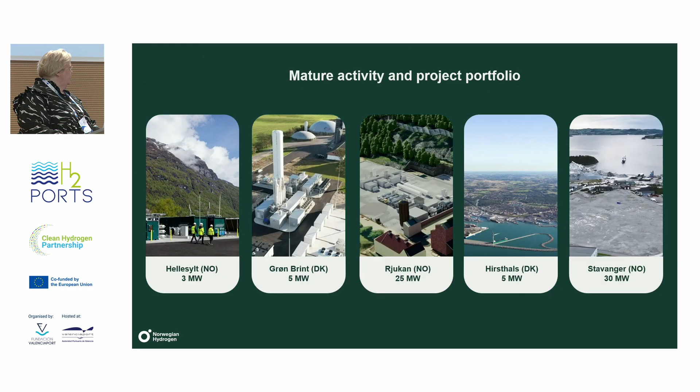Then there's the Hirtshals project, which I will talk about today. And then we have in the pipeline also a project in Stavanger in Norway, which is pretty much similar to what we are doing in Rjukan. So if we can make things work at Rjukan, it will be more or less the same that we can do in Stavanger.

If we go to the Hirtshals project, I just have a few slides on the concept. As said, Norwegian Hydrogen, we produce the hydrogen in the port. We're actually located in the port because we were invited into the port.

The port of Hirtshals wanted us to be centered there. Please come here, build your green hydrogen production, because then we can say to our customers that you have green hydrogen here. You can buy green hydrogen from your neighbor.

I think that's one of the important things, that even if you do small scale—Hirtshals is still a small scale project with a 5 megawatt electrolyzer—it is feasible when your customers are your neighbors. It's not that much feasible if you need to transfer it for long distances.

Some of the other actors in this slide, next to us, is Biomega, which developed food supplements. At the moment they are using natural gas in their burners, and they're willing to shift to using green hydrogen there. So they will be sort of an industrial off-taker for our hydrogen.

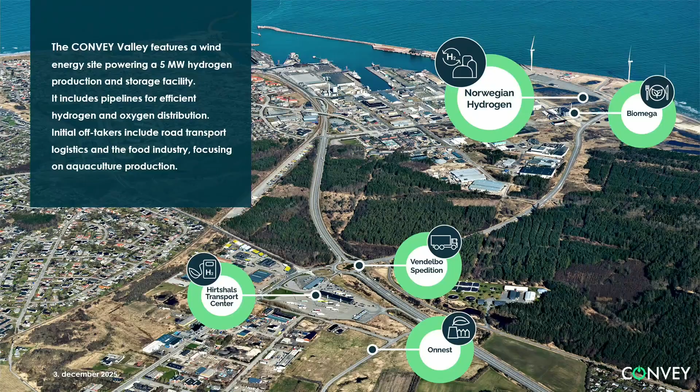Then the other cluster of companies on the slide is Hirtshals Transport Center and Vendelbo Spedition. Transport Center will be the location of the refueling station for heavy-duty vehicles. And Vendelbo Spedition is a logistics company who is willing to test hydrogen-driven trucks.

The last company on this slide is Onnest, and that's maybe the wild card in our project. So we're not only talking about green hydrogen and how you can make business out of that, but we also acknowledge that in the process of producing green hydrogen, you also produce significant amounts of heat and oxygen. Thus, it makes sense to find some use for that.

And Onnest is a very innovative company who is developing land-based fish farming. Some of you might know that if you do land-based fish farming, you can produce better quality fish because you avoid a lot of diseases that you could get in the more traditional ways.

For them, the business case is different and interesting because they don't really care that much how much it costs, because their customer is willing to pay for the added value produced in a circular manner. It is added value for that produce, even if it's more costly.

That's a dream business case that I'm trying to also find in the hydrogen segment—how we can find the niche markets where we can actually say that it's fine that it costs a bit more because our customer who is using this product is willing to pay a bit more.

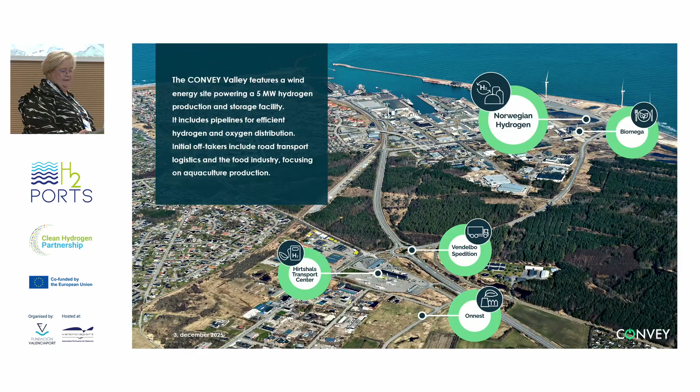I think we all should be willing to pay a bit more to save this planet. We can't all buy cheap trash from Temu and keep our lives like that. We all need to adjust a bit. And I think Onnest is a great example of that, and I'm quite excited how it's going to develop.

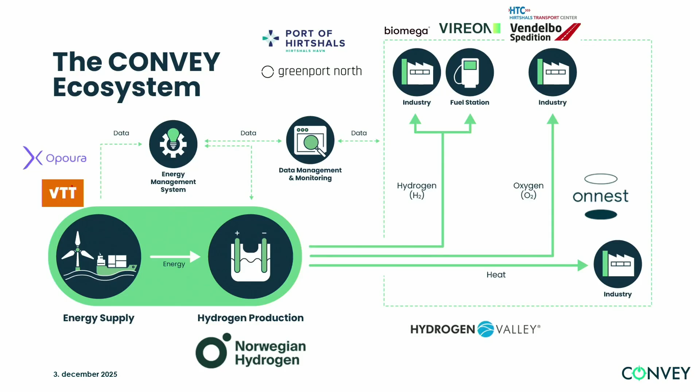Maybe if we then look at the broader side, we also have partners like VTT and Opoura. VTT is the academic partner, developing models and helping us understand how things could look. Opoura is then the industrial IT partner who is going to make some algorithms to actually manage the whole energy system there. In addition, we collaborate with Hydrogen Valley, who is doing all the communication and replication work for us.

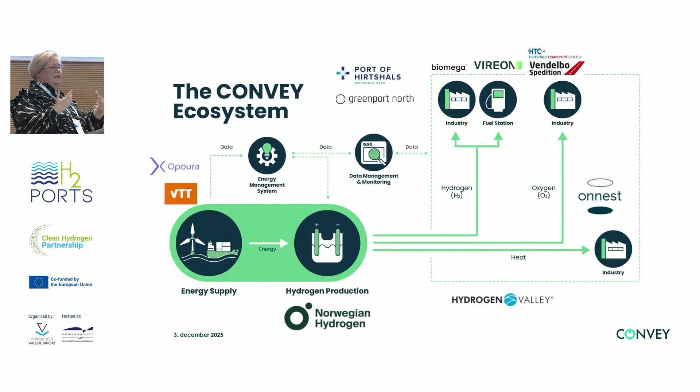We have Port of Hirtshals, Greenport North, a lot of actors around to make it happen.

If we then look at what we've managed, we are now in our second year of the project. We were also happy to see that even if things get delayed, they somehow get to the end, like here you've managed successfully to do, which is obviously a goal for us too. So far, we've been focusing on the energy system design.

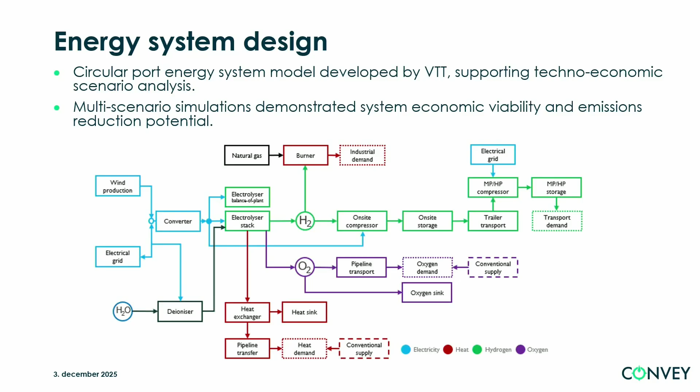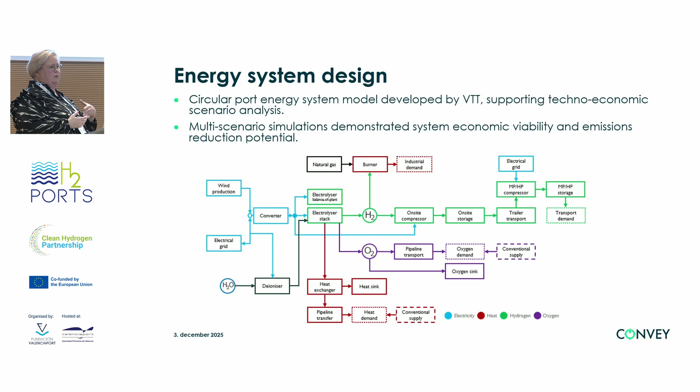Our partner VTT has developed an energy system model, and we've used it especially for the end user segment in the project who don't yet understand what hydrogen is, or what green hydrogen is and how it affects things. It's been a good tool to visualize how it could look, and the simulations have shown it's economically viable with potential for emission reduction, which makes it easier when we discuss offtake.

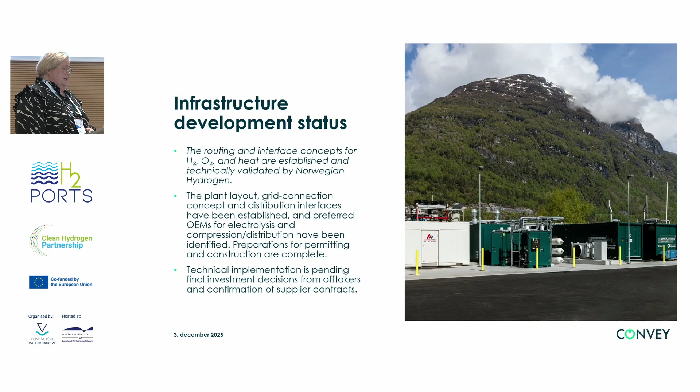When we look at infrastructure development status, we've designed the concepts for hydrogen, oxygen, and heat delivery. We have the plant layout, the grid connection concept, and all the distribution interfaces ready. We've done all the preparations we can for permitting and construction. The only thing pending is the final investment decision, which depends on the firm offtake agreements we need.

In our case, it's not that our customer isn't interested in hydrogen. The problem is that this world isn't perfect, so there are additional challenges, not hydrogen related, among the different stakeholders, and we're mitigating that. But we have good leads. We've expanded the off-taker group a bit further from the port to see how to solve it. Technically, we are ready to go as soon as we fix that final part.

We haven't just been sitting on the ready-made design; we've also been working on the business model and exploitation part, and that's been really fruitful. I think that's where this valley structure adds value, because you can build a trusted environment between the off-takers, the port, and us as developers, and discuss together.

What I picked up today is that you have to have a win-win business model, and I truly believe in it. I've done previous work building community business models, trying to find common value, and that's what we're trying to do here too, to make sure everyone gets something out of it. Obviously we all need to adjust a bit, but also that everyone can make something out of it.

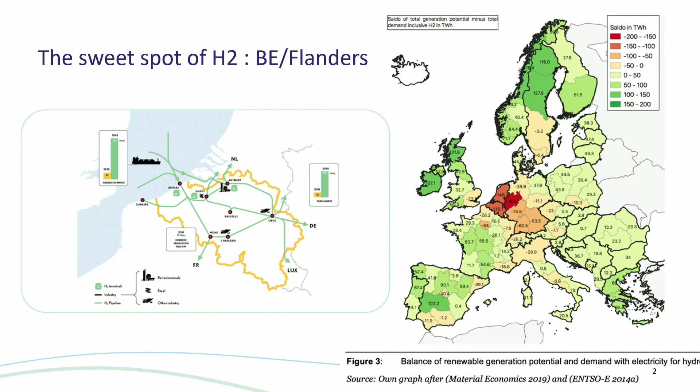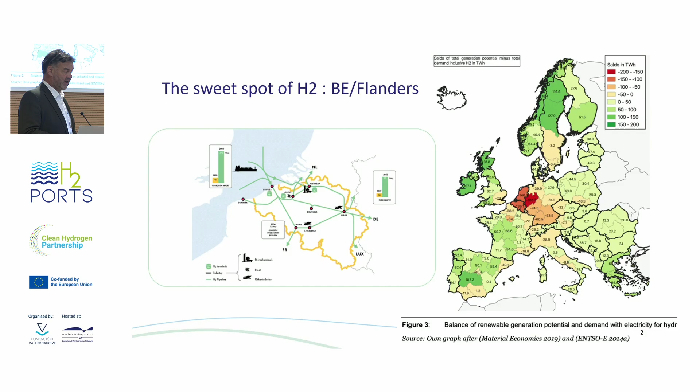I'd like to start from this slide, from the right-hand side. This is a study made by the Wuppertal Institute of Energy a couple of years ago, but over the long term it's still very valid. This graph shows Europe, and the color indicates the energy deficit. Red means there is a renewable energy deficit compared to what is actually being produced - less green energy produced than needed. In the green areas, there is sufficient or more energy produced. This means that in the area of the Benelux, Germany, and a little of the north of France, there is a systematic deficit of renewable energies.

Obviously, if the ambition of decarbonization still stands, if you can't make it yourself, you need to import. I'd like to use that specific argument to go to the left-hand side of the slide, which is pillar number 1 of the Belgian Hydrogen Council hydrogen strategy. We feature ourselves as an import hub - bringing green energy in the form of hydrogen, in its pure or any derivative form, from wherever the sun or the wind around the world is very cheap or efficient. We'd like to bring it into our country, and we are very happy to have the Port of Antwerp-Bruges, two brother-sister ports. We also have the North Sea Ports - Ghent and Vlissingen - and Ostend. So we're rather spoiled with having so many ports in a very close and dense area. So the ambition of pillar number 1 of the Belgian Hydrogen Council is to import that hydrogen.

I believe the ports have a very important role to play there, because they need to prepare themselves to be able to capture that new commodity, compared to what petroleum was in the past. Now, for as much as our ports here are importers, we also need to make sure that on the other side of the world, where the sun and the wind are cheap, there are ports who can actually ship it. Very few ports are equipped to load ammonia or other facilities onto big ships to carry them. So the ports - and we had that point in the previous session, what is the role of the ports - well, they should be able to facilitate the transport of hydrogen or its derivatives from one side of the world to the local ports here.

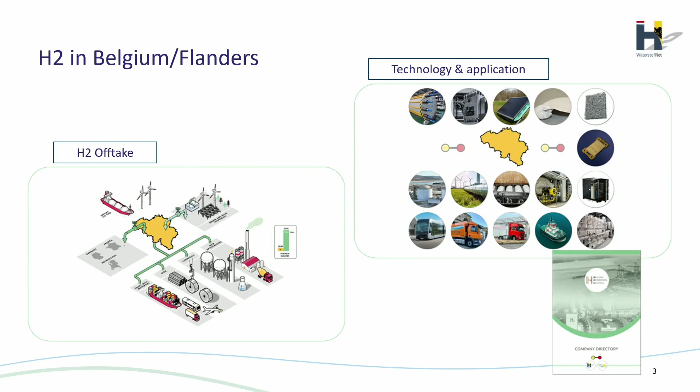So that's pillar number 1 of the strategy. But pillar number 2 is also important, and there the role of the ports matters too - that's the left-hand side of this slide. It's the utilization of hydrogen in all its different forms. The port itself brings in the hydrogen, and of course it should stimulate hydrogen usage around the area. Antwerp is the second largest chemical cluster in the world - Houston is number 1, Antwerp is number 2.

Obviously the chemical industry is an energy intensive, hard-to-abate sector, so any hydrogen, directly or indirectly, can and should be used - that's pillar number 2 of the Belgian Hydrogen Council hydrogen strategy - to use it in the chemical sector, for steel factories, and also in heavy duty transport. I think the usage of hydrogen in the port itself, as we have seen today in the tour we made, is very good, but is probably just a fraction of what the role of the ports could be.

They have to be able to spread it around and make sure all the others could be using it. Then maybe the third factor of the Belgian Hydrogen Council, just to be complete, is that the technology suppliers we have in our area are very much focused. To name a few, we have electrolyzer makers, membrane makers, diffusion layer makers, and we make all the projects and technology for the off-takers.

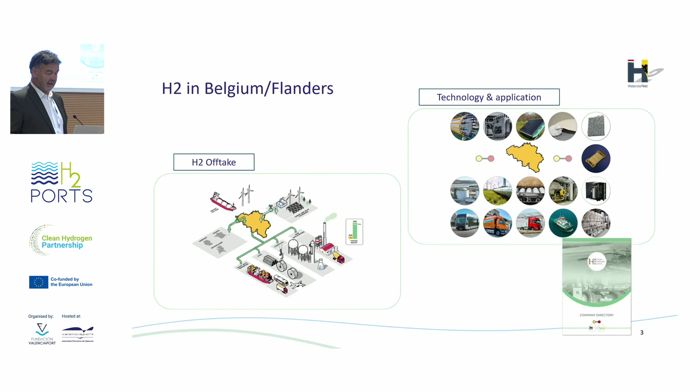So I think the reason why the port is important is that in the overall Belgium strategy, the import and the consumption is featured around what ports could bring and give. I'll just give you a couple of examples. It's already addressed by Stijn, but these are the hydrogen activities currently happening in Flanders, Belgium.

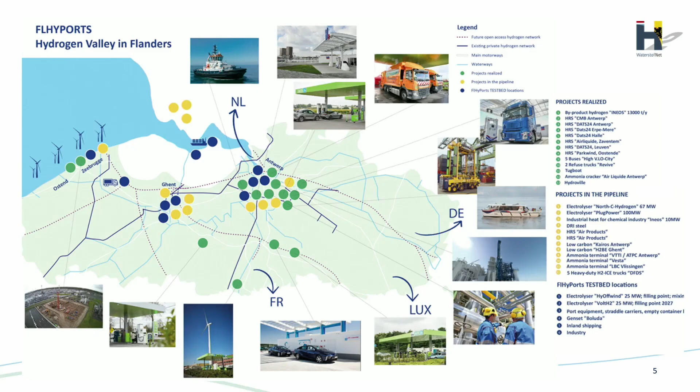Now, what is important is that the big dots I just explained are the bigger projects, and these are, how to say, the smaller dots of all the different kinds of activities and projects currently happening in Belgium. The green dots are the ones, the projects which are realized - quickly going through, we have a whole palette of refueling stations, mobile applications by buses, garbage trucks, tugboats. The pictures illustrate that. The ammonia cracker I referred to - these are all projects which are currently already operational.

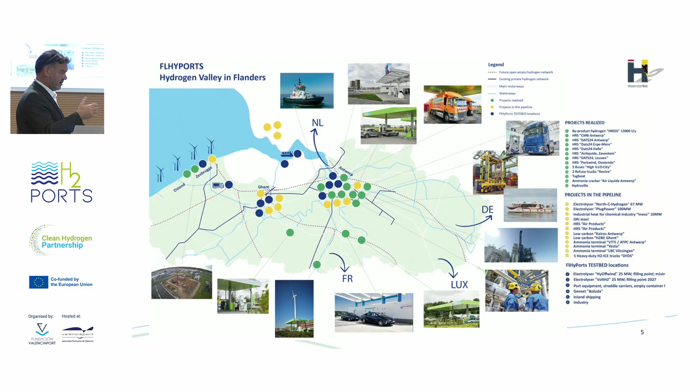We have the yellow dots, these are projects in the pipeline. Now, the pipeline can be short or can be long, and many of you are involved in certain projects. So they are ongoing, they have been announced, and obviously depending on the stage, the financing, the decision-making, FIDs, they are in further or closer realization - electrolyzers, refilling stations, ammonia terminals, and so on.

And the last ones are the dots or applications which we have put into a European-funded project by the Clean Hydrogen Partnership - thank you Valerie and thank you Mirella for pushing or pulling it through. It's basically all about connecting the dots. What we have is that all of these dots are now systematically going to be connected to create a hydrogen valley in our region. Because in the past, what you see, these are all individual projects, and the synergy between all of them is sometimes very hard to find. You can only prove that an ecosystem is working when you connect the dots and tell them, now you swim or now you fly on your own wings, and the business case becomes reality.

As long as the money is there from the project, it's okay, but it's after when we need to realize this. So this is what we are going to do in the project FLHyPorts.

Simply said, this will be the green electrolyzer, 25 megawatt electrolyzers, which will make the green hydrogen. One of the companies, gas supplier Messer, is going to distribute them to the different applications, to the refilling stations from Virya. We have at the moment 9 in Belgium. They all get the green produced hydrogen.

We will have the genset, the onshore power generation and port applications in the different ports in Zeebrugge and in Antwerp. We will have the Hyster, the one we saw today in the port of Valencia. We will get a very similar one in Antwerp. And we have also the straddle carriers.

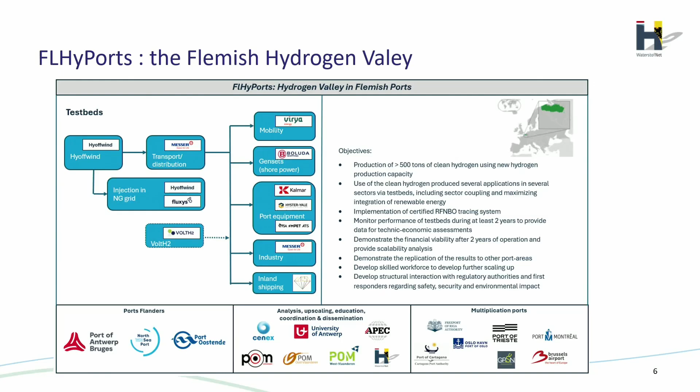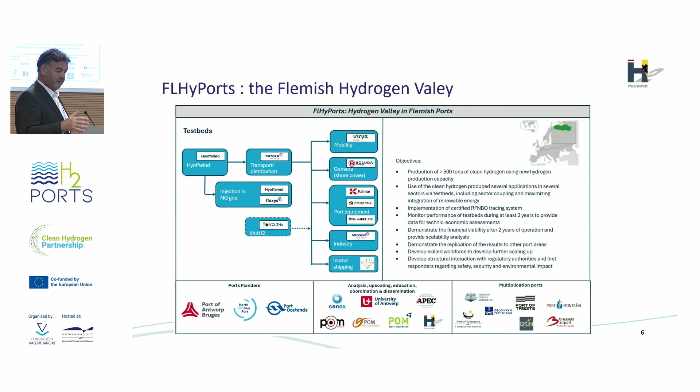Now, for as much as the green hydrogen can be used in each of these applications, it's all nice. But what do you do with a certain surplus? The location of the electrolyzer is just next to the Fluxys natural gas grid. So whatever cannot be used as hydrogen green application, we would like to put it into the natural gas grid. You can do this up to 2% without any concern, making the gray natural gas a little greener.

For that, we have different kinds of objectives. I'm not going through all of them, but for instance, the certification of the RFNBO system is going to be part of the whole exercise. We're going to make sure that everything runs for 2 years, and we will make sure that the results and the ports indicated down there are going to be replicated.

Connecting the dots is important. Connecting the valleys is important. But connecting the ports is equally important. Because all the experience we're building up on one side, you don't have to learn, you don't have to reinvent the wheel again, we can easily share. That's also part of this project.

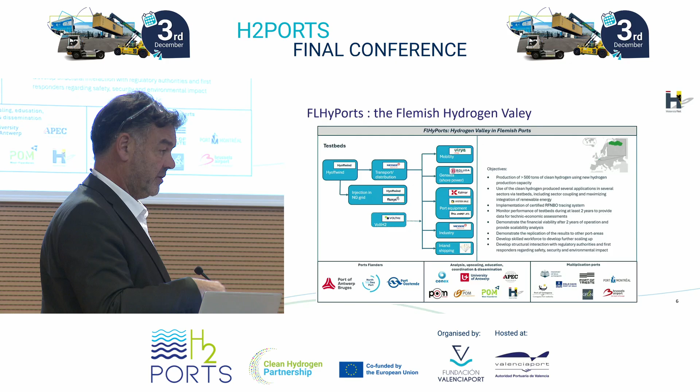What we have found, we will make sure we can disseminate this in an open and fair way, just to make sure that we connect them. In the beginning I said ports will transport hydrogen from one side to another. We need to make sure that all these learnings get shared very simply and very systematically.

How are we going to do that? Of course, you need to rebuild the ship itself, and then you need to make sure the ship gets provided with hydrogen. We're going to have the ships docking. We are going to take off the hydrogen, which are stored in container-sized storage tanks.

So a big container full of storage tanks, 40 foot or 20 foot. We're taking the empty one off, putting a full one back on. We do that usually in pairs too, so you have some redundancy, and off the ship goes.

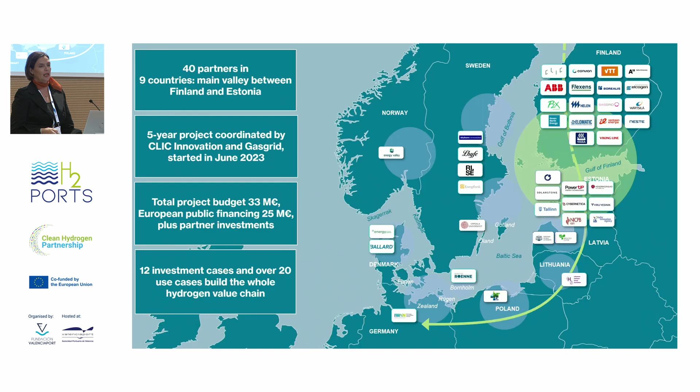This is the picture of our entire consortium and the region that we cover with our valley. It's a really big one, I think by far the largest in geographic perspective, maybe also in terms of hydrogen, I'm not sure. We basically cover the entire Baltic Sea region with our valley. We have 9 countries involved. The light green sphere connects the southern part of Finland with Estonia, which is our main valley where most of our investment cases are located. But we have 6 more connected valleys inside our valley project, and we have some cases in those connected valleys too.

Our joint goal with this valley is to really develop an international hydrogen economy in this region. As we are all exporting countries, we understand that with this work, we are really developing the global hydrogen economy, and of course the European one at first.

It's a 5-year project, and we are halfway now. We have 40 partners, and 33 million is the total budget, but you will soon understand why this is not the entire funding that comes to our project or these cases. We have several end-use industries involved: chemical, refining, petrochemical, fertilizer, even food industries, and of course energy and transport, including both the maritime and aviation sectors.

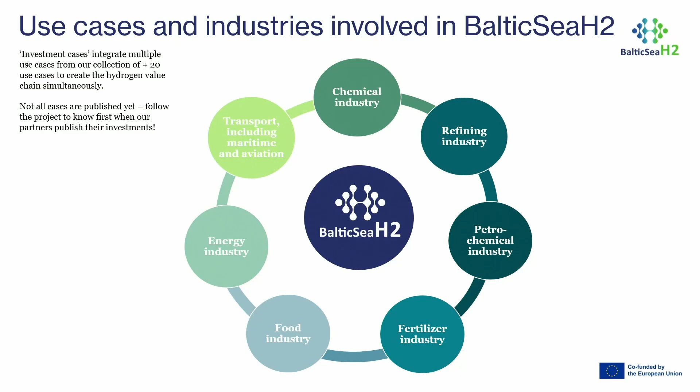Here you can see our implementation plan for hydrogen production. We have our first production plant already in operation, located in a place called Harjavalta, a small town inland in Finland. This case is by a company called P2X Solutions. It's a 20 megawatt electrolyzer, and they are producing clean hydrogen, part of which is converted to e-methane through a biocatalytic methanation process. This plant has now been running for about a year, with a capacity of 3,000 tons of renewable hydrogen per year.

Our second plant is now under construction, by a company called Helen, which is the local energy utility company of the city of Helsinki, the capital of Finland. This pilot plant for 500 tons of renewable hydrogen per year is located in the harbor of Helsinki, in the main cargo port of the city. It's for refueling purposes, and could also serve the machinery of the harbor since it's located there. It's also connected, for excess heat, with the district heating network of the city of Helsinki—a nicely sector-coupled plant, which is actually one of the main features of our valley, that we are investing a lot of development work into sector coupling across all our cases.

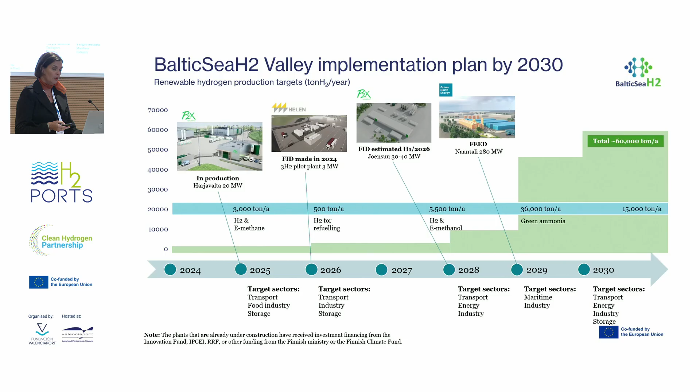I wanted to say a few things, but since I don't have so much time - this is not related to ports, but I just wanted to briefly mention the status of the hydrogen pool.

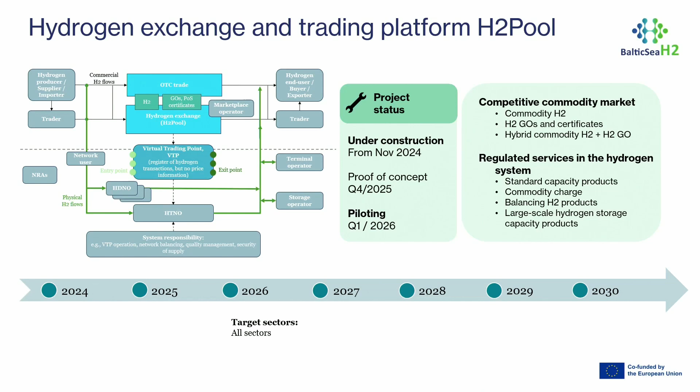With our valley, we have a strong ecosystem approach, and we are doing a lot of co-creation together. This is one example of that co-creational work. So we are developing a hydrogen exchange and trading platform called H2Pool, and we will start piloting it next year. If this is something of interest to you or to your investment case or valley, please send me an email. I think it would be a good idea to engage more players in this co-creational work so that this platform could serve basically anybody, all cases. At the moment it's connected with the hydrogen pipeline plants, but it's designed so that it can also be disconnected from the pipeline transport.

The first one is Port of Visby, which is located on the island of Gotland in Sweden, in the very middle of the Baltic Sea. This island has the goal of developing a fully integrated energy system for the island, so that the port would be basically fully integrated with the island's energy infrastructure.

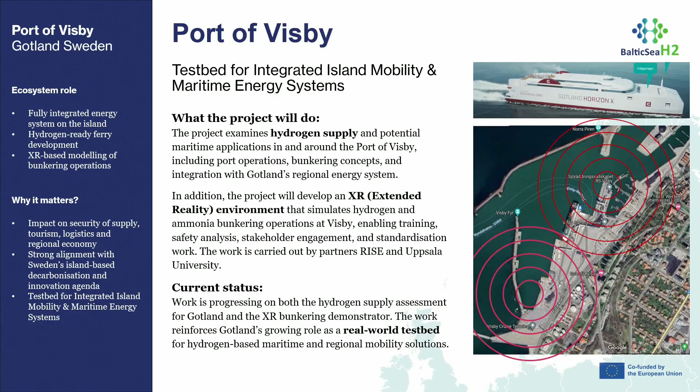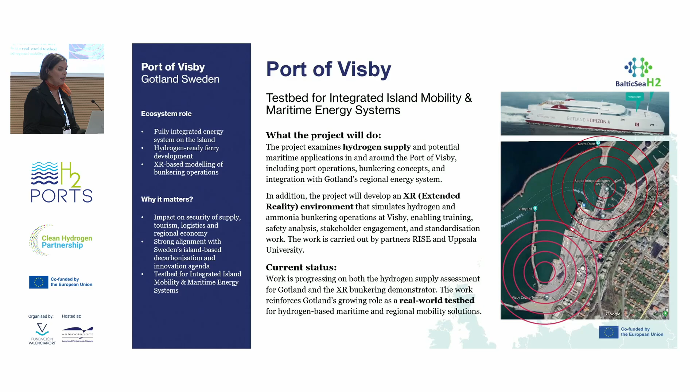In our valley, our partners are studying the hydrogen supply and potential maritime applications in the Port of Visby. They're analyzing the port operations, bunkering concepts, and integration of the port with the energy system of the island. In addition, our partners have already developed an extended reality environment that simulates the hydrogen and ammonia bunkering operations in this port, and they have been using that for training already, for instance this kind of safety analysis that you can see in this snapshot on my slide. So work is going very well, and it's nicely aligned with the other efforts of the island of Gotland, and they have this goal of becoming a real-world test bed for these hydrogen-based maritime and regional mobility solutions.

Then my next port is called Port of Rønne, which also is located on an island in the southern part of the Baltic Sea. That island belongs to Denmark, and this island as well has a goal of becoming an energy island where they connect offshore wind, P2X, and the port operations together through smart grids as well.

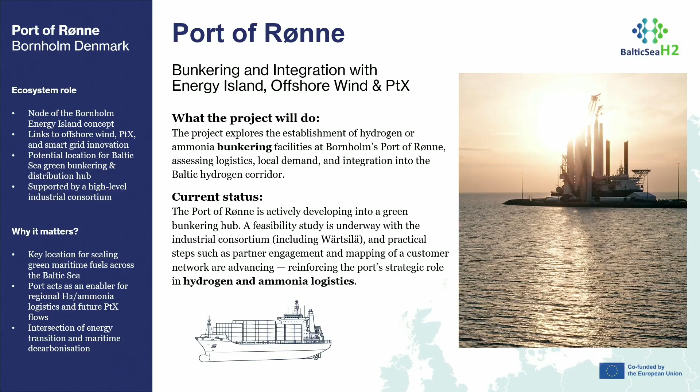In our consortium, the partners are studying the hydrogen bunkering facilities to be designed for the Port of Rønne. They are analyzing the logistics, the local demand, and how this bunkering could be integrated into the Baltic hydrogen corridor. This work goes very well, and my goal was to somehow explain how this really is an ecosystem kind of effort and not everything can be done with one project. So they also have some parallel projects ongoing. They have a nice industrial consortium in place, and one of our project partners, Wärtsilä, is also in their other projects, supporting with aligned goals - very nicely complementing the work that we do in our project.

Then I will move to Latvia. We have 2 ports in Latvia.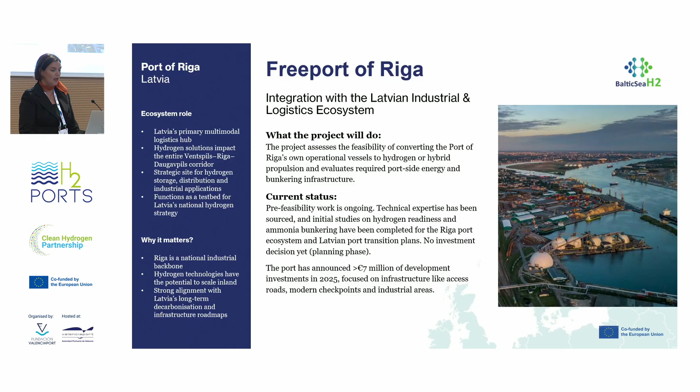The first one is the free port of Riga, the capital of Latvia. This site is a really industrial hub of Latvia, and this port also has a strategic role in the hydrogen strategy of the country. In our project, our partners are assessing the feasibility of converting the port's own operational vessels to hydrogen or hybrid propulsion, and they are also evaluating the portside energy and bunkering infrastructure.

This is going nicely, but there are no investment decisions yet by the port for the bunkering. Anyways, the feasibility work is progressing well. I wanted to bring one more complementing ecosystem activity to the table: the port has this year announced a rather large investment decision for infrastructure development, like roads, over 7 million. So this is very nicely supporting the activities we do in our project.

Last but not least comes the port of Ventspils, which is also an industrial hub on the west coast of Latvia. They have a goal of developing this site into a strategic green ammonia hub and an enabler for cross-border ammonia, chemicals, and fuels exchange. In our project, the partners are analyzing the potential transformation of the existing ammonia terminal into a green ammonia production, storage, and maritime bunkering hub. The scale is rather large, 250,000 tons of green ammonia.

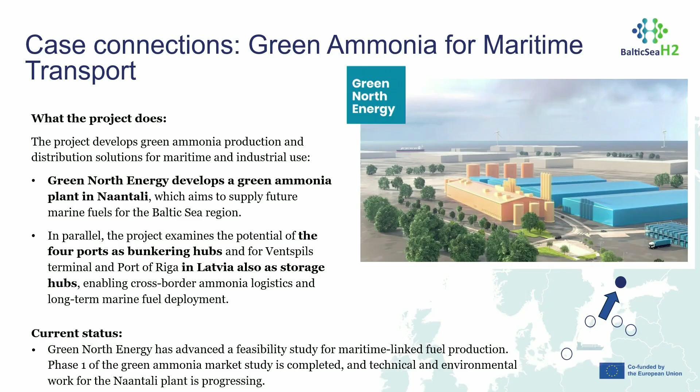Then there's some very good news: the case I already mentioned has actually tripled in size during the 2.5 years our project has been running. This is the green ammonia for maritime transport by Green North Energy, the 280 megawatt electrolyzer investment. So it really has tripled in size during these 2.5 years, and of course it takes time because it has grown. Unfortunately, they are not able to deliver it before the end of our project, but they are doing the front-end engineering phase at the moment.

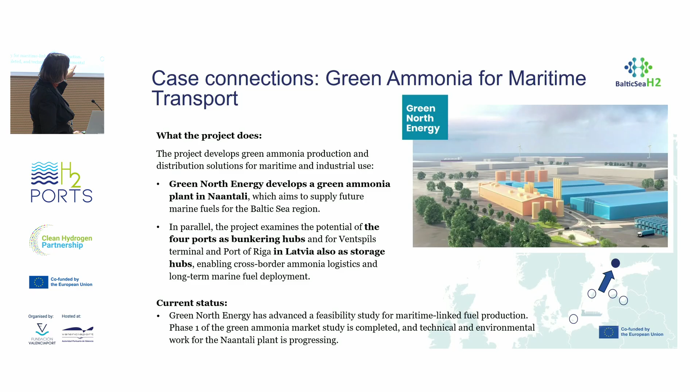As you can see on the small map in the lower right corner, all these cases—Naantali is the case for Green North Energy, located in the harbor of Naantali, an industrial harbor—and then we have all the bunkering stations and storage stations in the southern part of the sea. So there are nice connections between the different cases by different players in our consortium.

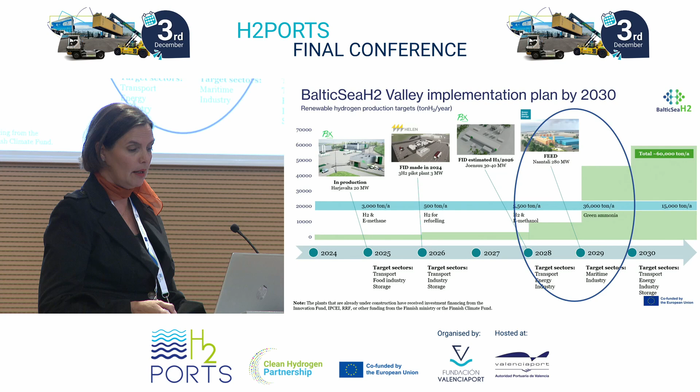Thank you very much, Ata. Indeed, I was thinking exactly that soon we will see starting the connections, and I believe that the most obvious one is the North Sea one.

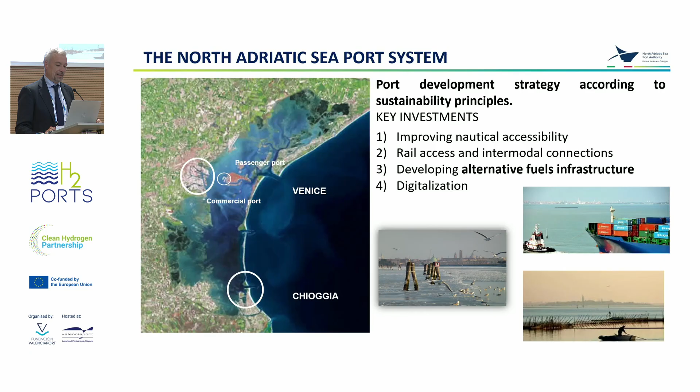So we are working a lot on improving our nautical accessibility, but always taking care of the environment. We are working a lot on improving rail access, but first of all, we are working on finding alternative fuels that are really important for the environment.

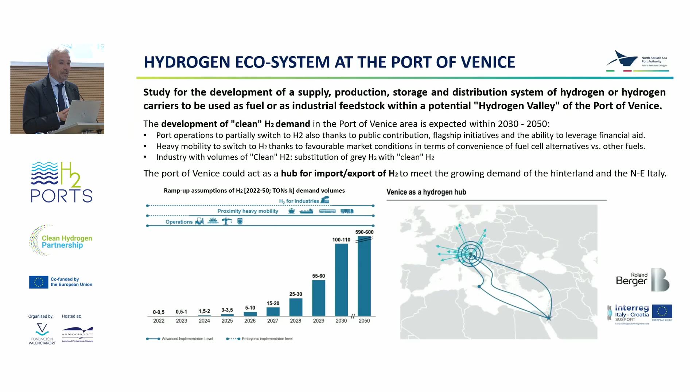Since some years ago, we started to understand what we can do with hydrogen. Is it something that is fine for our port or not? What would be the magnitude of hydrogen for our port? So we made a study with Roland Berger to find market demand for the Port of Venice.

We were really surprised because we realized that we have real big numbers for Port of Venice, because we can combine the real use for port users - tractors in the port, trucks, ships, tugboats - but also there is a huge demand for hydrogen from all the factories around the port.

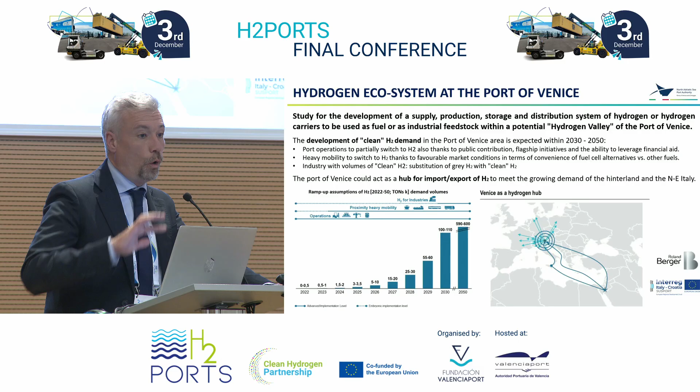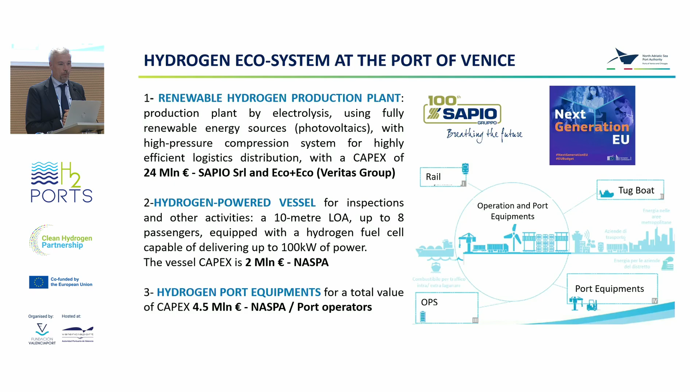So we started with some political agreements. We signed a memorandum of understanding with the hydrogen park located in our port. We are a member of the European Clean Hydrogen Alliance, and as a public body, we don't make direct investments as a port authority, but we foster private investors in our port, following all the different parts and actors we can have.

So there are users in the port - we need a fuel station, we need storage in our port, but we also need to feed all the industries that are around the port area.

I will now show you, very quickly, three projects - two are already in place, one is a long-term project. The first one is from Sapio, a famous and historical producer of hydrogen and other kinds of gas. At the moment, they already produce hydrogen in the Port of Venice. They have a pipeline that distributes the hydrogen in the network, but now they are building a new hydrogen production plant from renewable energy - a photovoltaic plant.

You can see here in the pictures - last July they started the works. It's supposed to be ready for next summer. It's a total investment of 24 million euros, and we estimate about 750 tons of hydrogen per year.